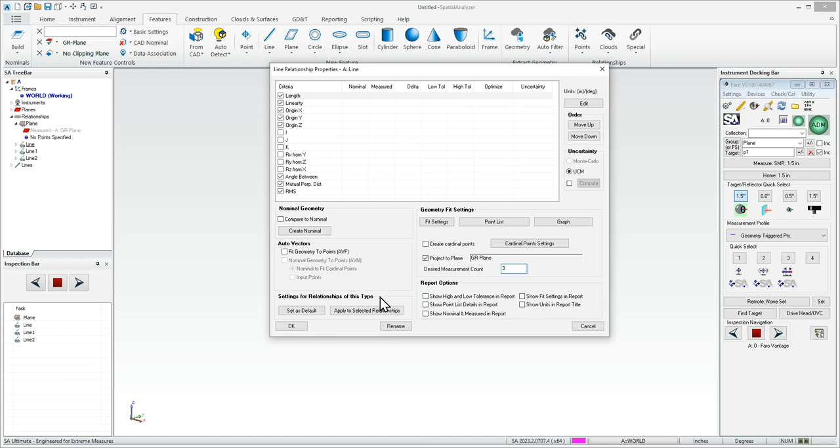So I'm going to say I want to use 7 points for my plane. And then for my lines, I'll go to the properties and say I want maybe 3 points per line, and apply that to all the lines. So we'll just say that's our desired measurement count setting. I'm already projecting them to the plane, so I don't need to worry about that. So I'm going to hit OK.

Now that I have that in place, we'll start taking some measurements. I'll make sure I'm on the proper reflector. At this point, I'm going to say let's be in stable points to SA, and I'm going to hit measure. It's going to want me to move, so let me go ahead and start taking some points.

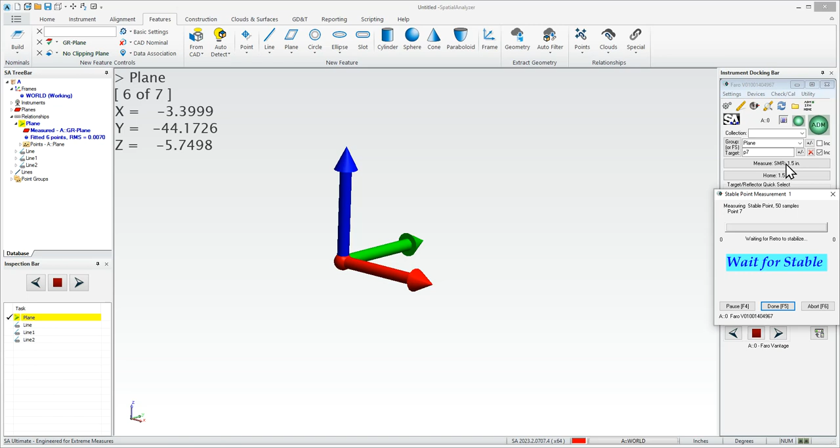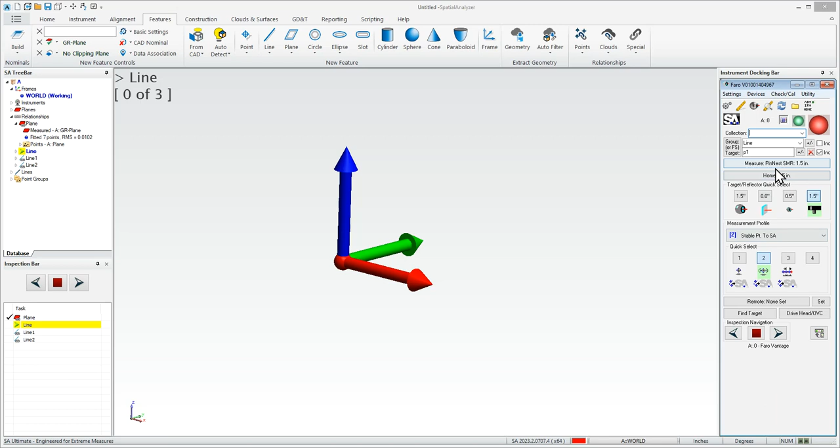That little sound triggered me that I'm now going to be measuring into the lines. So before I do that, I want to make sure I'm switched over to the proper tooling that I set up using an edge nest or pin nest in this particular case. So I'm going to go ahead, again using stable point, and begin measuring using our lines. I'll start closest to the tracker, and there's part of the beam. So there's point 1. This line.

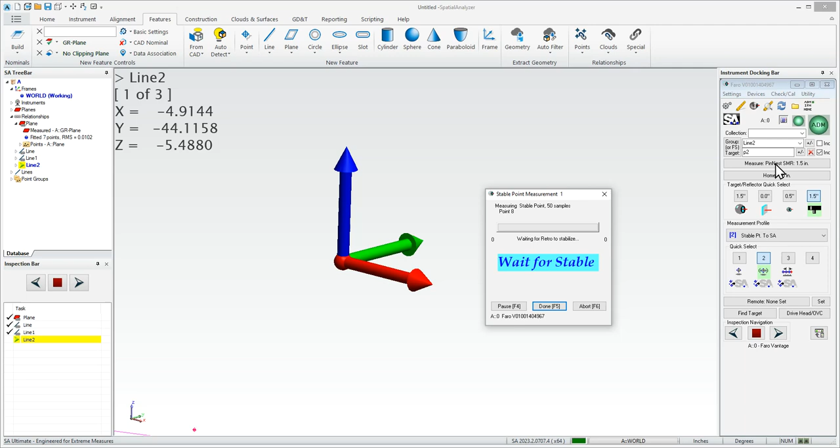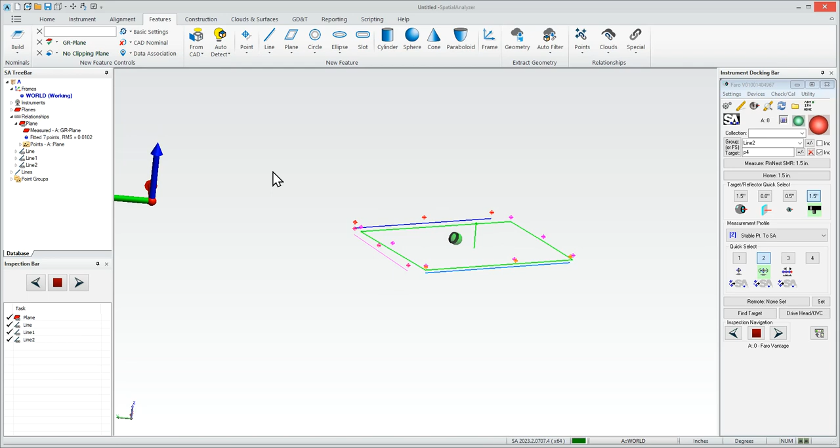And we'll pause that. So I'm going to come over and take a look at what I've measured so far, just the end of my table. And we can do some things. If I want to be a bit more precise, I can grab the midpoint of that line based on these.

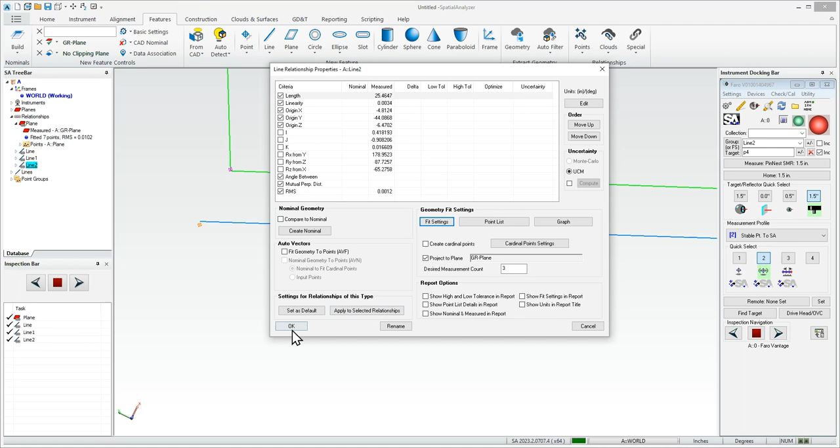But I do want to take a look and make sure these are offsetting the proper direction. So if I look at line 2, I think in that particular case, since I used a pin nest, I can go to my fit settings and tell it, no, I really measured outside that way, so my line's offsetting towards the edge of the table. If I wanted to get a dimension, then I could.

Look at this straight down on it and see the same thing. Same thing with my original line. So in my properties here, we'll go to our fit settings and say we measured actually that direction. I think, yes. In here, and the same thing with this one. So from where my tracker was sitting, it looks like that one did go the proper direction. So I've got my offsets pretty nicely for my table.

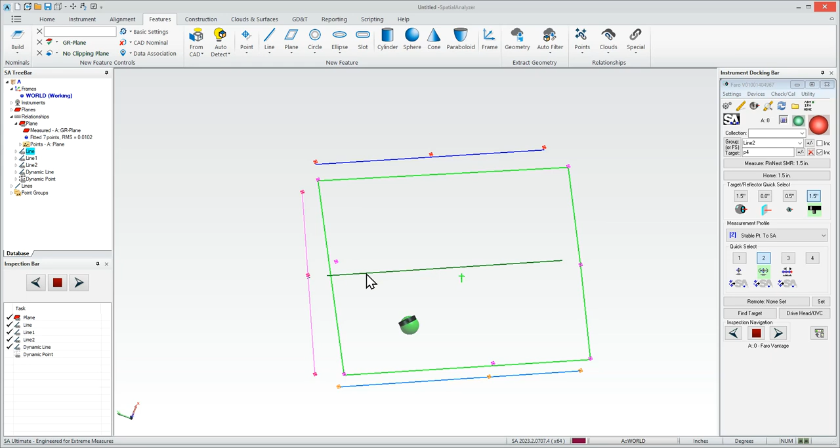Some things we can do with the relationships or our features: if I hit the drop down on these particular things, I can tell it I want to bisect 2 lines. So in this case, I can just select these 2 and get my bisecting line. And if I want my origin point at that intersection, I can just tell it, let's do midpoint of 2 perpendicular lines. So select line 1, line 2, and there's my midpoint.

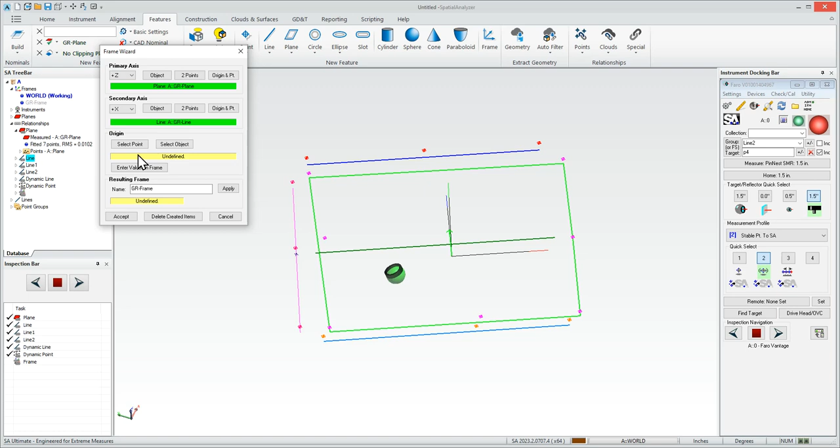So I'm going to wind up using that for my frame. Let's go ahead and construct the frame. For my z-axis direction, let's pick our plane. For my x-axis direction, I'm going to pick my line. Now the direction is going to go from point 1 to point 3, so that's kind of important. For my origin point, I'm just going to select that particular origin point we have in here. I can name it whatever I want, but I'll just go ahead and hit accept at this point.

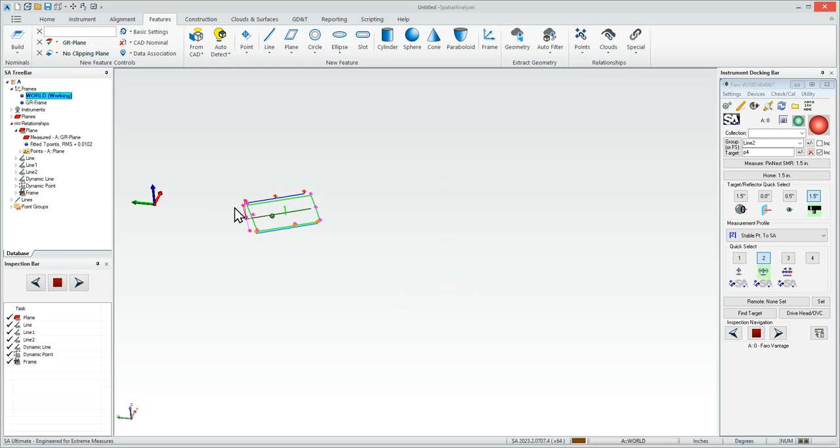I'll pick our world frame as my nominal, and what that also enables me to do is, if I take a look at world, I can come in and say I actually want to use that new frame. Let's just align that to my world coordinate system, and now we're good to go. So now X means something, Y means something to me. So that is kind of important when we want to set up our geometry triggers.

So let's do that. I want to measure the top of my table in a way that gives me nice orderly data for cross-section analysis, or perhaps I just want to sweep a surface through constructed B-splines or groups of points. Geometry triggers are a nice way to organize your data that way, especially if we're trying to figure out the shape of a surface and don't have a CAD file for it. So let's set up some geometry triggers.

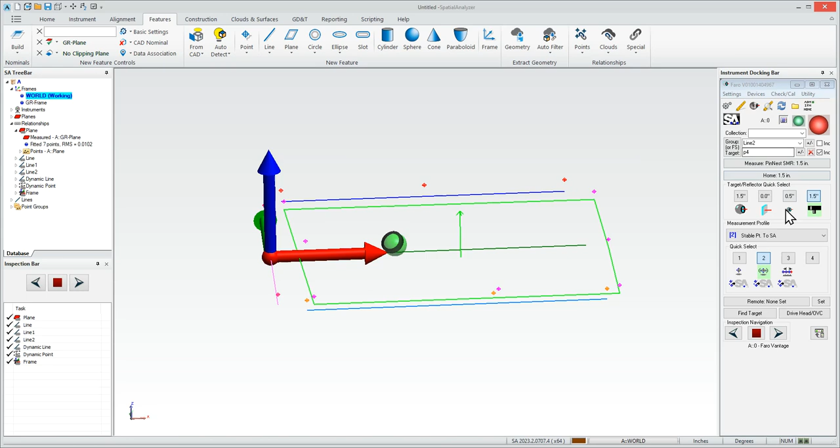I'm going to go to the instrument interface and select the measurement profile called Geometry Triggered Points, down near the bottom. To set these up, I'll go into the parameters for that profile. Notice I don't have any geometry triggers set yet, so these will simply be planes that as I pass through, I'll get a measurement. I can define whether that goes along the x-axis, z-axis, y-axis, or all of them together.

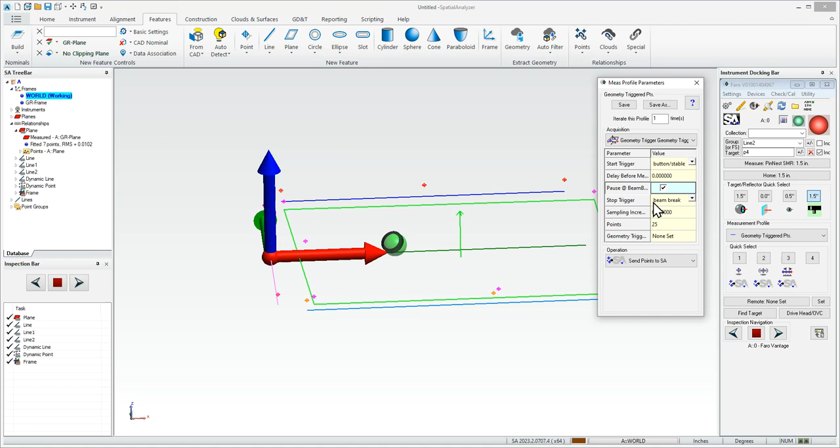I'm going to have my start trigger be button stable, and I'll say pause at beam break. Then we'll go from there. Let's take a look. If I left click here in geometry triggers, I can now create those planes, so I'm going to add planes.

I'm going to use a Cartesian format instead of cylindrical, since I'm not measuring a tube or anything like that. If I had planes already set up in SA, like along a B-spline, I could pick these if they weren't going in a straight direction. But in this case it's pretty square, so I'm going to pick Cartesian.

In the x-axis direction, let's start at 2 inches out from my origin. I'm going to stop at 30, or I'll start running into junk stored on my table. And I'll set the spacing to every 2 inches — I think that's reasonable for what we're doing here.

I'm going to interpolate the data. In other words, as the tracker senses the SMR going into the plane and exiting it, it will figure out where that point is as it passed through the plane. If I do closest point instead, it just takes the closest point to the plane — some might be before and some after going through it. So in this case, I'm going to do interpolate.

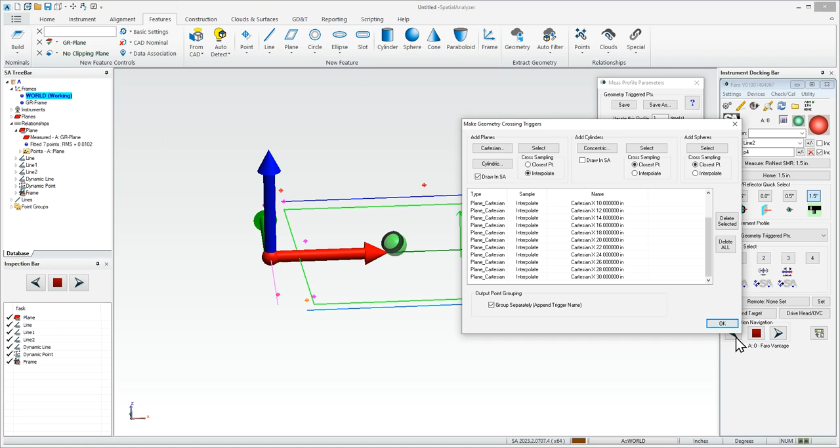Check that as well. Now I can either draw these in SA or not — it doesn't really matter, but I think for purposes of seeing what's really happening, we'll go ahead and draw them. We can delete them later. When I click OK, these are the geometry triggered planes, so as the SMR passes through them, I'm going to get measurements.

For this case, let's just not show my lines here. I'm going to save my geometry triggered points and close this profile. I'm not going to worry about the group name, because it's actually going to take these planes, and that's going to be my point name grouping. I'll get out of my pin nest and just use the SMR — first we find the reflector.

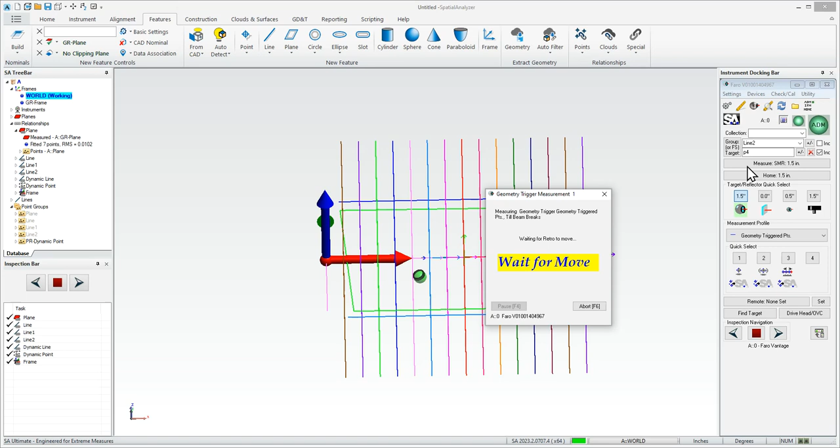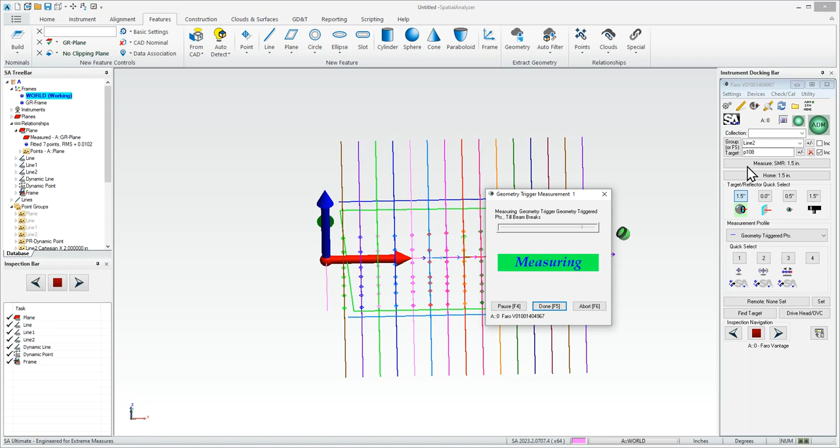So we have a reflector. I'm just going to hit measure with geometry triggered points and the proper reflector selected, and now it's going to wait for me to move. I'll start off with the SMR on the table before reaching these planes. Now it's measuring, and as I measure, I can simply scrub the surface back and forth.

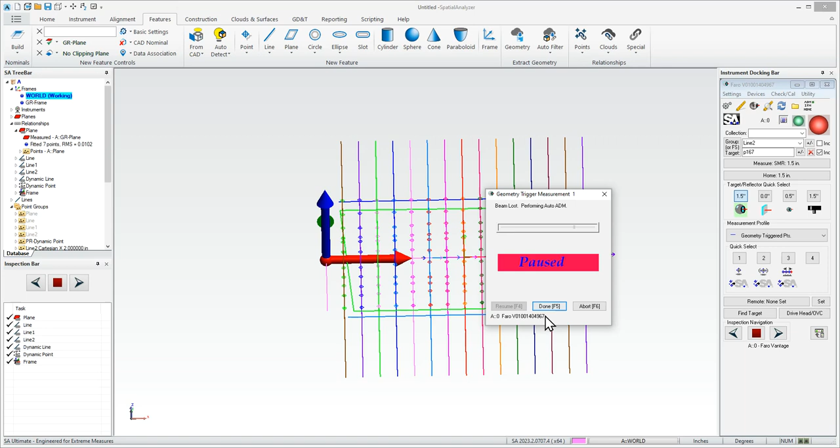All right, I think that's enough. Let's take a look at what we got after doing that. If I take a look, let's go ahead and hide all these planes as well so we can kind of see what's going on. You see we have our data structured very nicely.

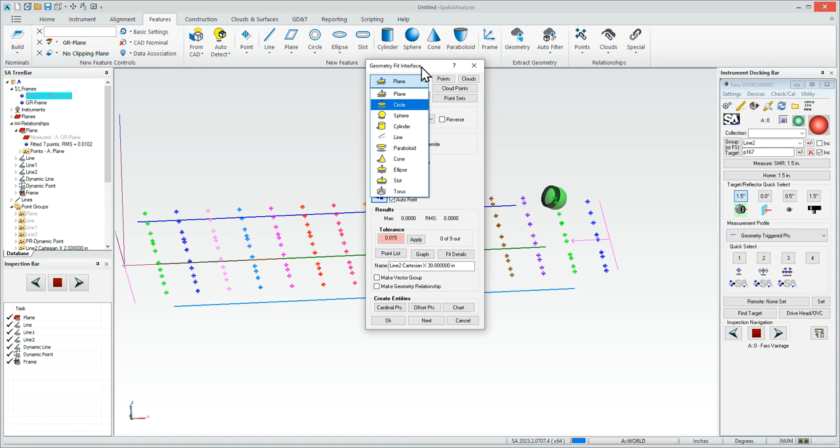From here I can just go to each one of these groups, go to the group menu, and if I wanted to fit geometry, I could fit a line or a circle, whatever features. If I'm measuring a pipe, for instance, it would let me structure my data so I could analyze circularity by building circles in a set region, or just use this for further engineering down the road. If I wanted to create some surfaces, we could certainly do that as well.

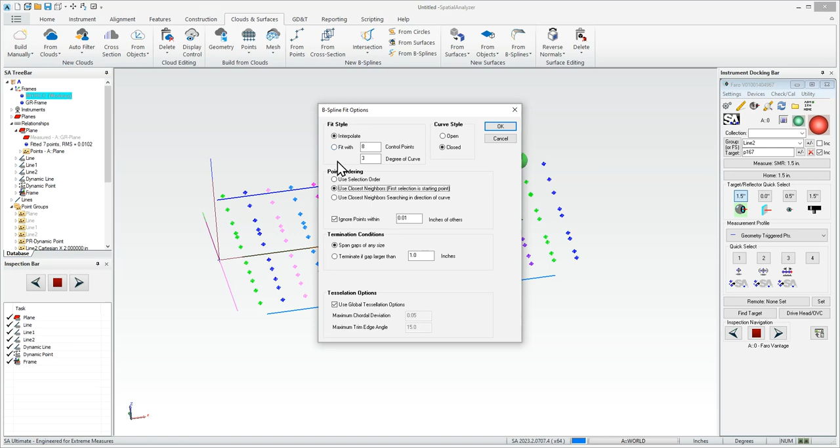So, surfaces from objects, from point groups. If I were to pick from here, I'd just start picking these point groups and tell it to use closest neighbors, ignoring points that were within 0.01. For this case, I'm going to span any gaps. I could do some more controls here, but let's just say it's going to be an open surface as we go. So let's click and see what happens when I hit OK.

Let me shade it so we can see what was done — and there's our surface, tabletop surface. So that's just one of the applications you might want for B-splines, for some GD&T checks, profile of a line for instance, where you want your data structured very tightly, so you know for sure you've got enough data points to adequately perform that kind of analysis.